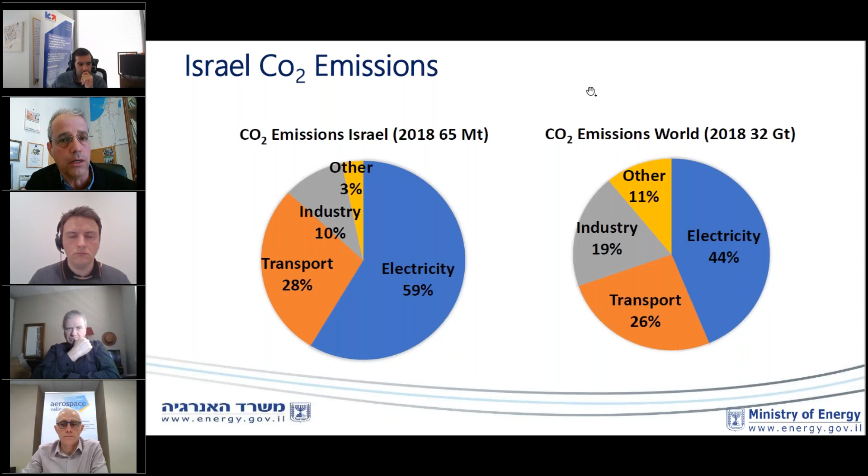Thank you. So for Israel, the situation is a little different compared to other countries. Every country has its own story, of course. In terms of CO2 emissions, which are the main driver for the transformation in the energy market, Israel has a very large electricity segment with about 60% of the CO2 emissions from electricity and then transport. The industrial sector in Israel is smaller, which is how we try to target our goals. Next slide, please. So our first goal is really the electricity market and the transportation market.

In terms of the way I view hydrogen, I like to separate it into 3 segments: the hydrogen generation, hydrogen storage and transportation, which are called logistics here, and then the hydrogen use, either directly as hydrogen, like in a turbine to generate electricity, or to generate heat from hydrogen, or through fuel cell to generate electricity again. So it's in a sense a cycle, but 3 segments.

The challenges in the hydrogen and the green hydrogen market are very significant still. First of all, there are costs in all 3 segments. The costs are high and not yet competitive. The logistics issue is a big issue. It's very problematic, as mentioned already. Hydrogen in aerospace, for example, can be liquid hydrogen, can be through a carrier or through compressed gas, but all of these have challenges in the logistics.

And finally, there is a very fundamental issue of the efficiency. So if we look at the whole cycle, the efficiency today of the whole cycle is around 30%, which in many ways, in terms of sustainability, is unacceptable, that we will throw away 2/3 of the energy. So we need to resolve all of these before hydrogen becomes a mainstream partner in the energy market. Next slide, please.

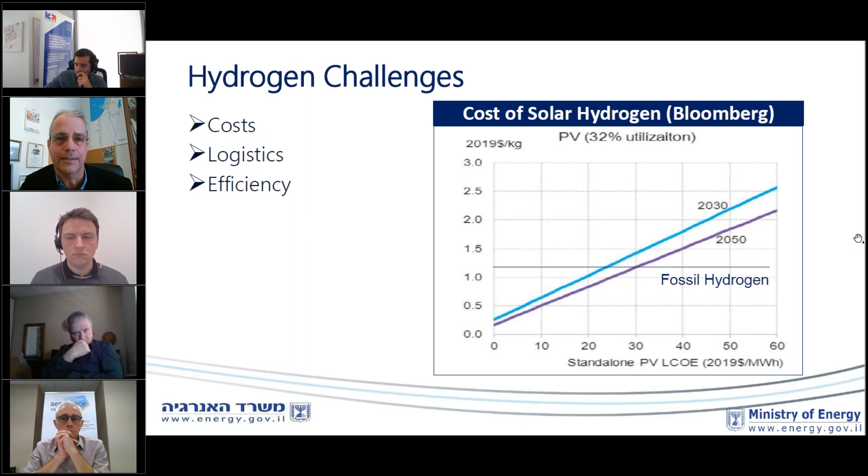I will now again delve a little bit into the special story of Israel. Israel is a small economy. So this means that Israel will not determine the market trends in hydrogen nor in any other markets. If the world goes to a specific solution, to hydrogen, Israel, of course, will follow. And this means that we will not be leaders in setting the trends. We cannot be; even if we think that one solution is the correct solution, it's meaningless. The larger countries will determine the world.

Israel is also a small country, so this has 2 implications. One, that for land transportation, potentially we don't need such long range solutions. We can probably do with shorter range solutions. And also, as we are a small country geographically, I will talk about it a little bit in terms of our renewable energy, which is solar and requires a lot of land. We have a smaller industrial sector, as I mentioned, and we have today large natural gas reserves.

I mention this because to generate hydrogen from renewable electricity takes about 10 times the energy compared to generating it from natural gas. Of course, we don't want the emissions from the natural gas generation. However, we do think there is a midway, in the sense that we are looking for technologies to generate hydrogen from natural gas without emissions. And this will be, I think, at least a temporary solution until the hydrogen market becomes mature enough and all the challenges are addressed.

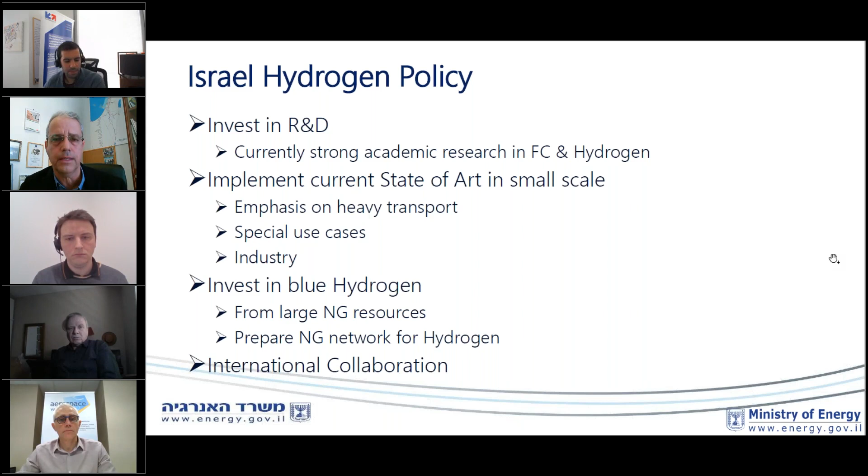We will invest in blue hydrogen as much as we can, or turquoise even, some if you are familiar with this term. And we will also want to prepare our natural gas transport system for hydrogen. Of course, we want to do international collaboration. We know we are dependent on that, both with our close neighbors and with Europe. And we have both plans for an electricity connection through Cyprus and Greece, and also originally a natural gas pipeline. But I'm sure that this pipeline will also be capable of transporting hydrogen in the future, whenever, if it's built.

A few interesting events and steps that we are currently taking: we are supporting essentially two refueling stations for hydrogen. They are in construction, hopefully will open this year. One of them will be a portable station, so it will be able to travel around and provide hydrogen where needed. We want to import heavy transportation, so as a ministry we're subsidizing essentially the buses, trucks, and heavy transportation that will run on hydrogen, so that we gain experience with using hydrogen.

And we are developing an intercity bus on hydrogen. This is not a tremendous innovation, but just adapting a bus to intercity, because we feel that this is where hydrogen has an advantage. We have several interesting startups, H2 Pro, which will be here later. And I mentioned already that we want to transform natural gas to hydrogen, so we are supporting methane pyrolysis research. And we are doing hydrogen storage underground. We are doing a new survey of the underground of Israel for storage and for CO2 storage, but also potentially for hydrogen storage.

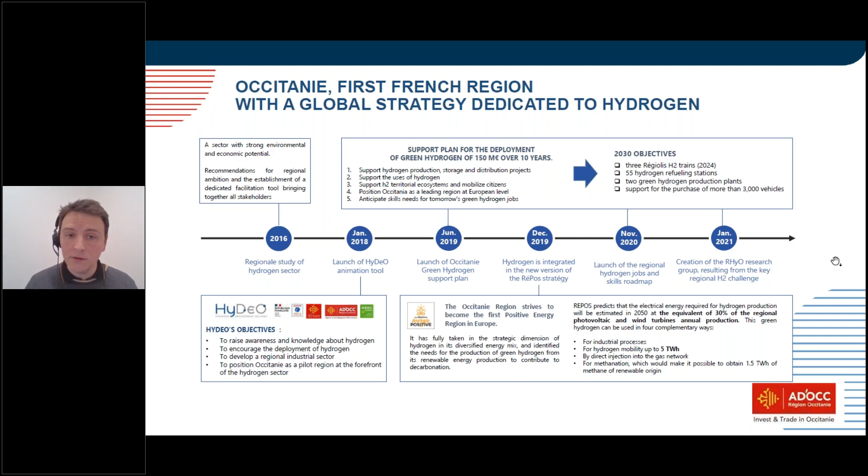In 2019, the Occitanie region launched a support plan dedicated only to green hydrogen, with 150 million euros over the next 10 years. Today, it's still the biggest and most important plan around hydrogen at a regional scale in France. We want to help the development and deployment of these technologies, generate huge projects, and because it's a region skilled, anticipate the development of skills and training to help companies and laboratories to recruit.

We have some objectives for 2030. We want to deploy hydrogen trains. We have an objective of deployment in 2024: more than 50 hydrogen refueling stations, 2 hydrogen production plants - green hydrogen production plants - and help the purchase of more than 3,000 vehicles using hydrogen as fuel.

It's part of our global climate and energy strategy to become a territory that produces the same quantity of energy that we consume. Hydrogen is a real help for this, because it's a possibility to convert and store renewable energy, and to use it to decarbonize mobility, industry, and buildings, for example.

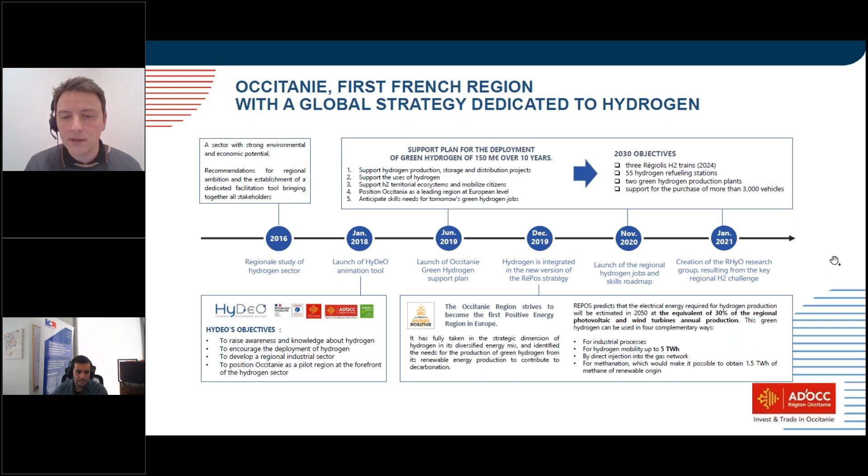Just to give you the last two points: we are launching a regional roadmap around the subject of jobs and skills, and we also created a global research and development group around hydrogen in Occitanie named RHyO, but I will speak about that just after.

The Occitanie region, like all administrative regions in France, has some missions. One of these missions is the development and coordination of transport in the region. We also lead and drive the main ports in the region. We identified that the use of hydrogen is a key factor of development, and where possible, we want to generate hydrogen consumption. That's the reason the region invests in 3 hydrogen trains. We want to put one in the Pyrenees mountain line, generating consumption of 62 tons of hydrogen per year.

We are also developing a hydrogen dredge for the harbors of Sète and Port-la-Nouvelle. We will be able to consume 72 tons of hydrogen per year. We are also working with the company Safra on the retrofitting of 15 coaches. And we have a huge project supported by the European Union with a global budget of 110 million euros, to deploy at the same time 2 green hydrogen production sites, 7 refueling stations for trucks, 40 trucks, and 62 refrigerated units for trucks. The name of this project is H2 Corridor.

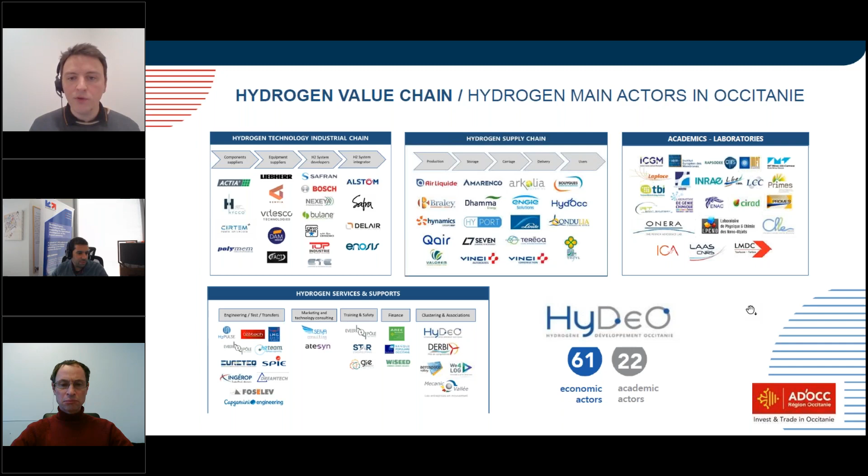On the global scale, it's more than 80 actors who are working on hydrogen in Occitanie. And if I put it on a map, it's the next slide, please.

You've got here the main projects with a color code. The blue ones are the industrial projects to develop and industrialize hydrogen technology. The orange ones are the infrastructure of production and refueling, and the green ones are the use, when we're leaving diesel consumption for green hydrogen consumption.

So you've got an overview of what happened in Occitanie. I hope it was very clear for you and very helpful. And I'm pretty sure in the next intervention, you will have the details that my presentation missed. Thank you very much. So thank you very much, Benjamin Febvre.

So indeed, it was clear. We understand there is a healthy competition as well in Europe to handle energy performance targets. And your demonstration shows the Occitanie region's strategy to position itself at the forefront.

And with Laurent Bizio, as you mentioned, we'll take it down now to the aviation applications. Laurent is also one of the main organizers of this webinar. At the Aerospace Valley cluster, you have a dedicated ecosystem on propulsion and embedded energy that you pilot. I told in the introduction that a third of all flights could run on liquid green hydrogen by 2050, for instance.

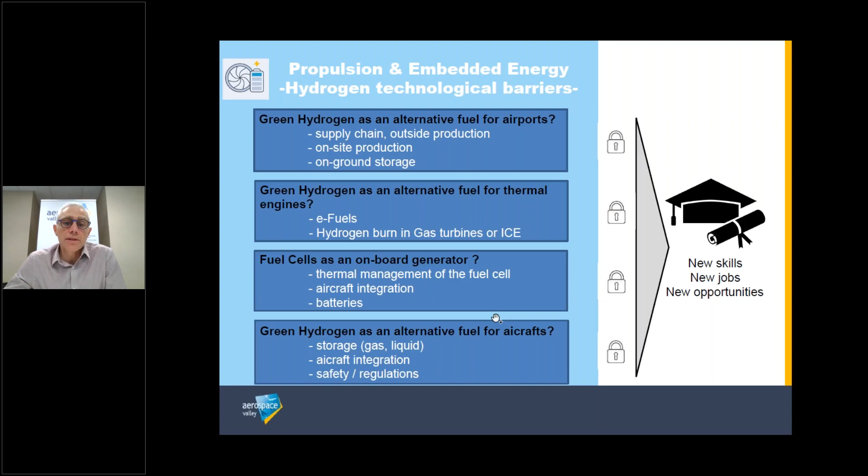What we think in Aerospace Valley is that light aircraft can be a very interesting and innovative laboratory, as a pre-chamber of commercial aviation systems, and as a demonstrator of new technology and return of experience for commercial aviation. That's the reason why we created the MAEL initiative one year ago, and now we have more than 300 members inside this community.

We think that with this initiative, we can develop technology in a quick way, because it's on smaller aircraft, so development delays are very short, and with a reduced cost to access this new technology. So thank you. We are very happy to develop this new chapter of aeronautics.

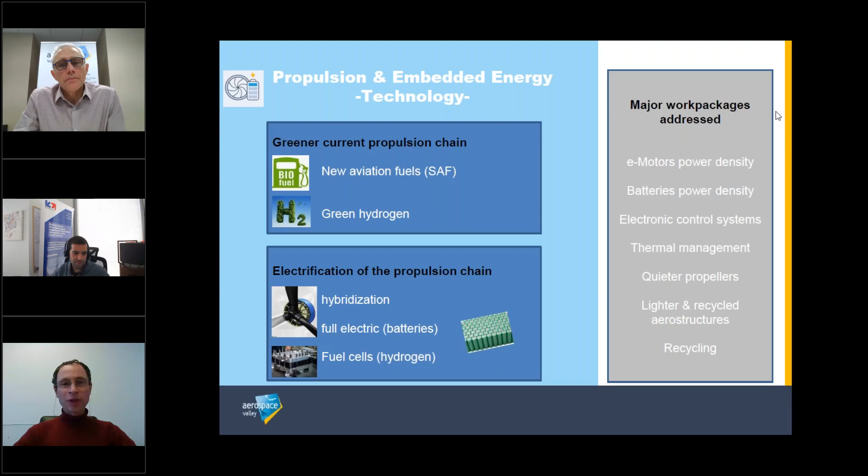We can't hear you. Hi, my name is Shachar, and I will be replacing Gideon for the Q&As. So the strategy in general is quite local. As Gideon said, we have several pilots here and the initial phases of a refueling station, etc. Apart from pushing forward the academy and the companies for innovation, we don't have any global strategy per se.

Okay, thank you. Thilo, do we have other questions, maybe for Benjamin or Laurent? I see a question for Laurent regarding the last slide: is the MAEL initiative open to international partnerships? Yes, the MAEL initiative is open to members of Aerospace Valley, and it's a good point. Among our 800 members, we have members outside the Occitanie and Nouvelle-Aquitaine regions. So yes, it's possible to have members outside the southwest territory of France.

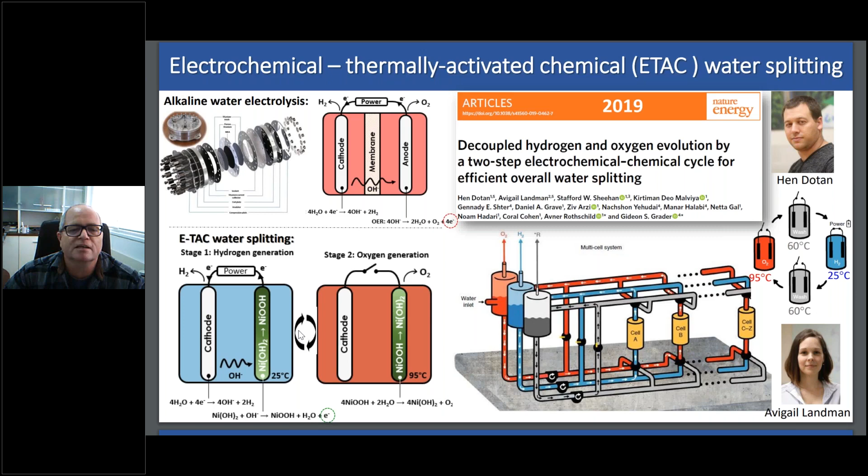If you look at the system, that's the figure on the right side. So each and every one of these cells is connected to three reservoirs. One has the hot electrolyte that generates oxygen. The other one has a cold electrolyte where we generate hydrogen, and we have a kind of a washing electrolyte to wash between the stages that is at an intermediate temperature. So this innovation was made by Hen Dotan and Avigail Landman, then students in our groups, and was published in this article in Nature Energy about 3 years ago.

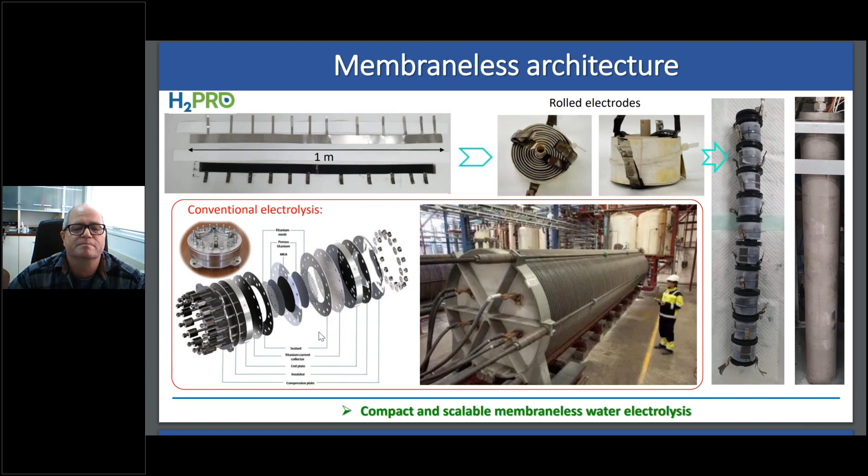The other advantage comes from high efficiency. So because we divide the process into two steps, we actually divide the oxygen evolution reaction into two steps in a way that is much more efficient and allows us to do our process at an average cell voltage of 1.5 volt, whereas other electrolyzers, except for the high temperature one, which is a different story, but all the low temperature electrolyzers, alkaline, PEM and AEM, operate at voltages above 1.8 and often above 2 volts.

So we can save a lot of energy, and our cell efficiency is close to 99%. And we expect that at the system level, we will be able to deliver more than 90%, perhaps even more than 95%. Next slide, please.

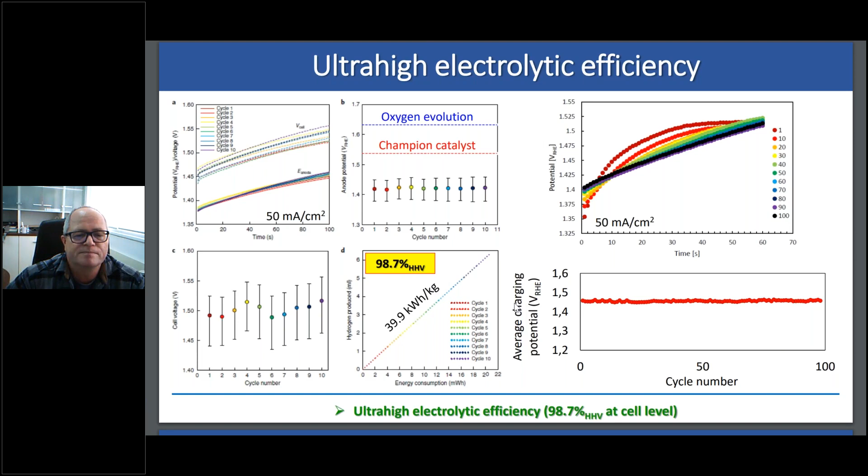Unfortunately, because there are 4 different species that are connected to this metallic site, they are never identical, which means that some of the reactions will be easier than the others, and other ones would have to be more difficult because the overall of the 4 steps is identical. And this is the reason for the overpotential loss of at least 0.4 volt, which degrades the efficiency of all of the conventional electrolyzers. So that is the standard electrolyzer. Now in the next slide, we'll show what we do in our case.

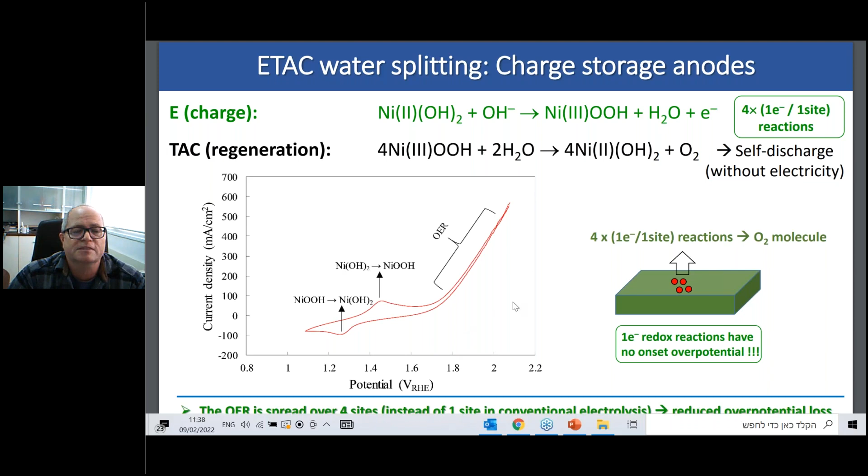So this electrode that we're using is based on the nickel hydroxide, nickel oxyhydroxide cycle that is not new. This cycle has been used in rechargeable alkaline batteries for nearly a century. So at least the charging reaction is the same reaction that you have in nickel metal hydride, nickel cadmium, and nickel hydrogen batteries. The latter is probably the most reliable battery that was ever made.

And the reason is because these batteries are the ones that are used in space missions such as the Hubble and other space missions, where they operate for many, many years. So this is a reversible reaction that allows us to run many tens of thousands of cycles. And the reason is because if you look at the atomic structure of this nickel hydroxide, you see that it is a layered structure where the hydrogens are connected to the oxygen and pointing up and down.

And essentially the difference between the charge and discharge is how much of the site is occupied. In the discharge phase, all of the sites are occupied by hydrogen, and in the charge phase, only half of them are occupied. So that is the mechanism of the charging. And then the second reaction, to generate oxygen, is pretty much the opposite reaction, which occurs chemically. Next slide, please. Last minute, Professor.

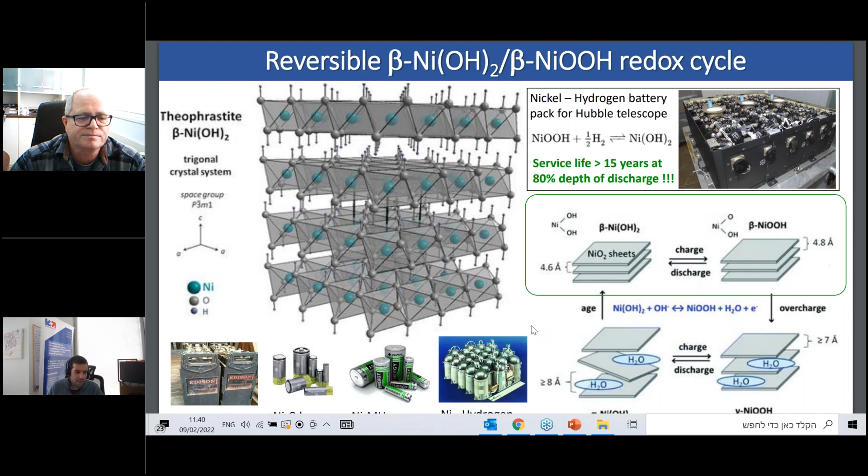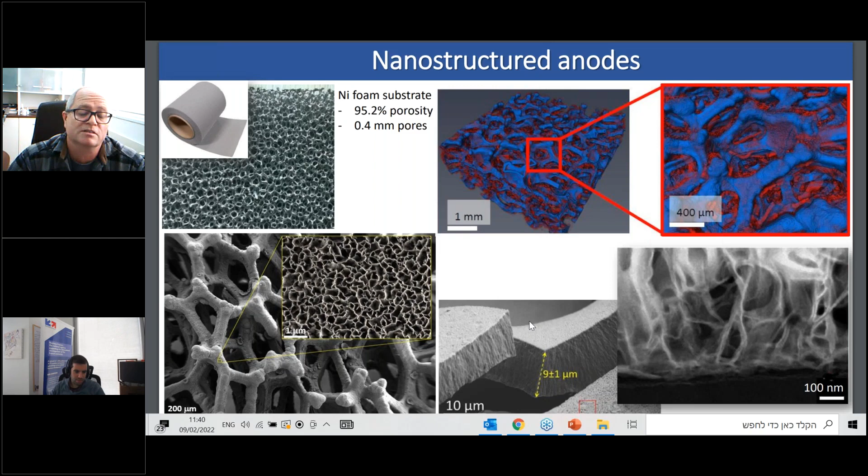Okay, so we take special care of producing the electrode in a very porous structure with fine internal structure that gives rise to easy access of the products of the reaction and the reactants in and out. So we start with a porous nickel foam substrate on which we grow our nickel hydroxide electrodes by electrochemical deposition, and we have this fine structure. You can look at the bottom right image and you see that we have flakes of only a few nanometers in thickness that allow very fast mass and charge transfer in and out of the active region. Next slide.

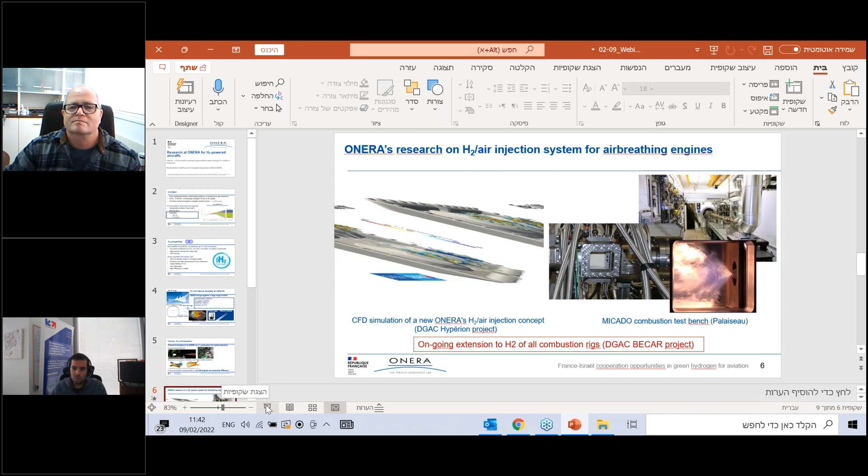And now we'll turn to Dr. Nicolas Berthier. If you can open your mic and camera, please. Dr. Berthier, you're a special advisor at the French Aerospace Lab ONERA, which develops research activities in the aerospace field. You are in the energetics department in the fields of numerical simulation and combustion, ONERA's representative for the regional key challenge, green hydrogen. What is your approach, Dr. Nicolas Berthier, to the existing challenges for aerospace systems?

Can you hear me? Yes, and do you hear me? Yeah, we can hear you very well. We just can't see you. Okay, so thank you very much.

My presentation is focused on research at ONERA for H2 powered aircraft. Next slide, please. Okay, to start my presentation, a brief reminder of the context. As everyone here knows, and as previously mentioned, the Paris Agreement and increasingly stringent norms on air quality impose finding solutions to reduce CO2 emissions and to improve air quality. For aeronautics, 3 ways are explored: sustainable aviation fuels, electrification, and of course, hydrogen, with 2 ways, fuel cell and combustion. In this presentation, we will focus on the use of H2 in aeronautics for combustion. Also, there are, of course, some common issues with the fuel cell, like storage, for example. Next slide.

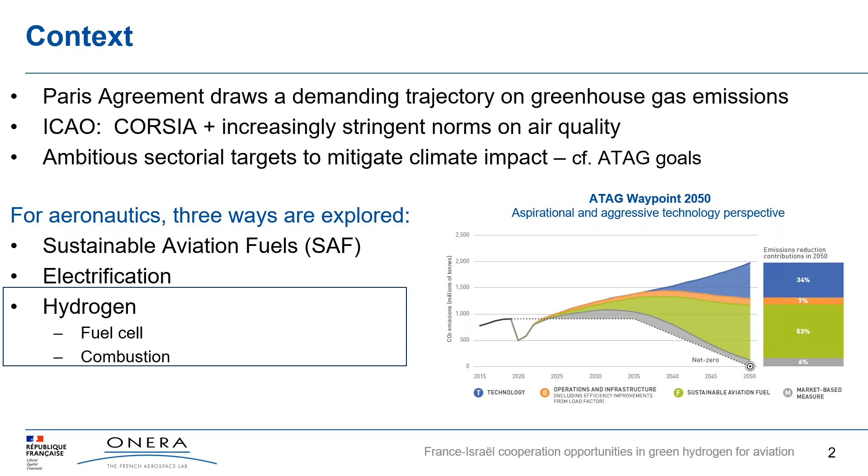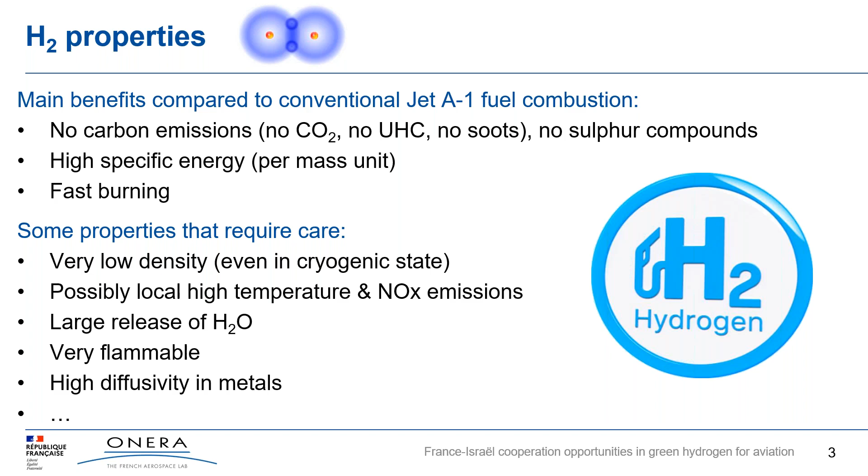Now, a brief recall of H2 properties. The use of H2 provides great advantages compared to those of kerosene. Indeed, there are no carbon emissions, no CO2, no HC, no soot, no sulfur compounds. H2 has a high specific energy, and H2 burns very quickly. But there are some properties that require care. H2 has a very low density, even in cryogenic state. There are possibly local high temperatures and NOx emissions, a large release of H2O. H2 is very flammable and has a high diffusivity in metals. So new technologies based on the use of H2 will have to exploit its strong points and limit its drawbacks. Next slide.

So the use of hydrogen for combustion in aircraft is a disruptive technology which impacts a large part of components. Therefore, to have a global vision of the problem, it's necessary to bring together a large range of skills like aerodynamics, energetics, materials, systems, which is the DNA of ONERA. If you look at the pictures on this slide, each of them illustrates a specific problem encountered with the use of hydrogen. From left to right, one of the greatest challenges with hydrogen will be the storage, probably under cryogenic state in order to increase density with the use of large insulated tanks. Choice of shape of tanks, which has a great impact on the design of the aircraft, materials of tanks, metallic or composites, and insulation processes are major questions currently being studied.

Then hydrogen will be led to the combustion chamber through an injection circuit, which must be perfectly sealed, even at the level of the welds, because hydrogen is a very small molecule which can easily diffuse through metals. Along this injection line, safety is therefore a first order problem, with in particular the treatment of possible hydrogen leaks. There will also likely be a fast change of hydrogen from liquid phase to gaseous one during its transport between the tank and the combustion chamber.

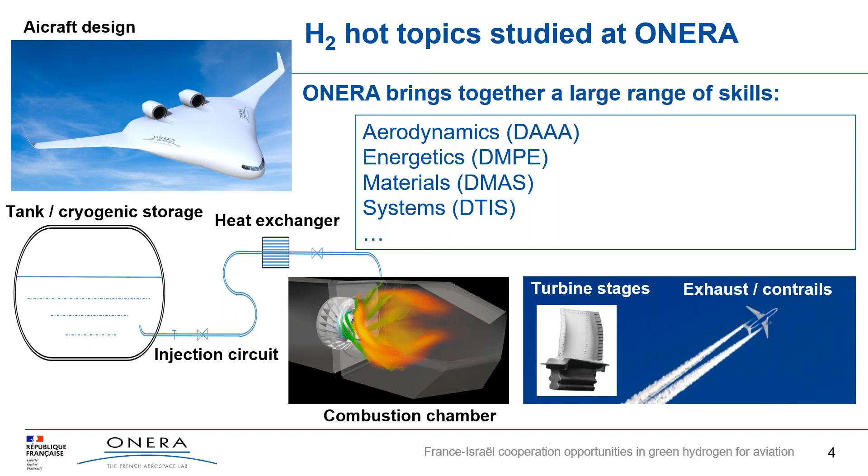There is an extensive background at ONERA on H2 combustion for rocket propulsion. But conditions on rockets and air-breathing combustion chambers are different in terms of power or pressure, for example. One of the most impacting features is that in rocket propulsion, O2 burns with H2, but there is no nitrogen. Therefore, temperatures are higher in a rocket combustion chamber, but above all, there is no risk to form nitrogen oxides. On the other hand, nitrogen oxides formation is of major concern for H2-air combustion chambers.

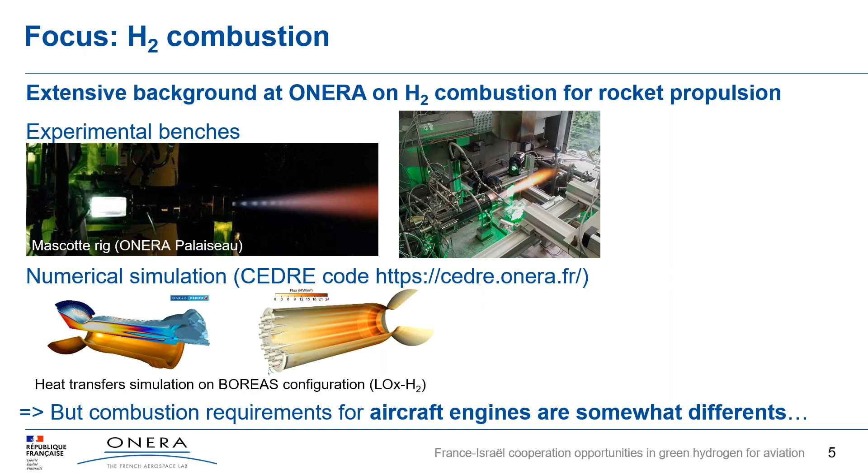Next slide. Therefore, we have been working at ONERA for more than a year on the conception of a novel injection system for aircraft, which ensures combustion stability, which is a very important point, and very low NOx emissions.

On the left of the slide, there is a movie of a numerical simulation result obtained with the ONERA CEDRE code. And on the right, the MICADO test rig, which will soon be used to test this injector.

These new injectors will be tested before the end of the year on our combustion benches at Palaiseau near Paris, or Fauga-Mauzac near Toulouse. Some of these benches could right now use a limited amount of hydrogen, and all ONERA combustion rigs will be gradually updated in the next years to allow a common use of hydrogen. These transformations will be carried out in the framework of the DGAC BECAR project.

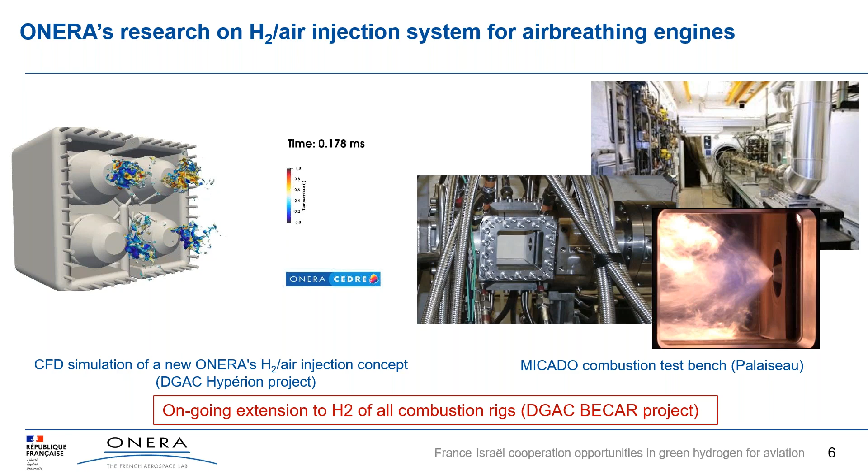Next slide. And at last, the Energia project, whose purpose is mainly to build a shared vision. It's a DGAC project led by ONERA with Airbus, Safran, and Dassault Aviation. There are two goals: to build a shared vision of the energetics outlook for decarbonization solutions, and off plane analysis. Some alternative fuels are analyzed, such as biofuels, electrofuels, methane, and of course hydrogen.

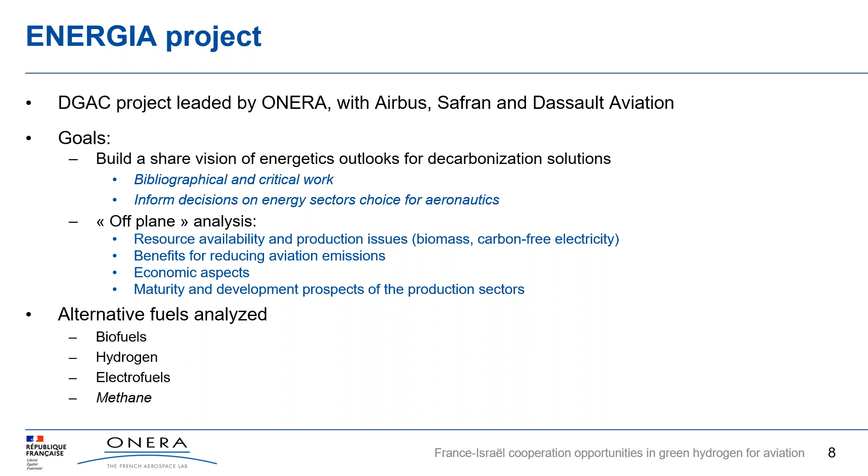Next slide. To conclude, H2 combustion could drastically reduce the environmental footprint of air traffic. Second, the physico-chemical properties of hydrogen are very different from those of kerosene and pose new scientific and technological questions. With both experimental benches and numerical codes, like CEDRE, covering physical fields ranging from aerodynamics to materials and energetics, ONERA can conduct multidisciplinary research on this new field.

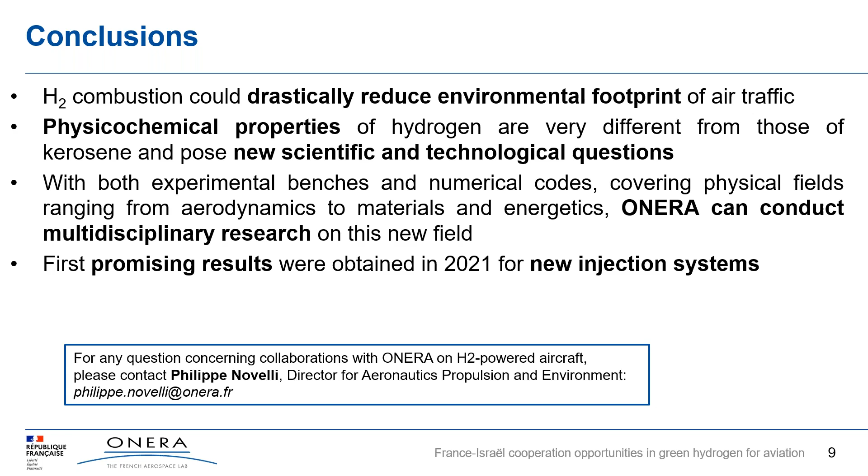And at last, first promising results were obtained last year for the new injection system. And, very important, for any questions concerning collaboration with ONERA on H2-powered aircraft, please contact our director for aeronautics propulsion and environment, Philippe Novelli, at philippe.novelli@onera.fr. Thank you for your attention.

Thank you very much, Dr. Nicolas Berthier, for explaining ONERA's approach and the promising results obtained last year. We heard before about the Technion's breakthrough research in Israel. Now, with another famous university here, Professor David Zitoun will present the Bar-Ilan activity on hydrogen regarding material science research for production and use of green hydrogen. Please, Professor Zitoun.

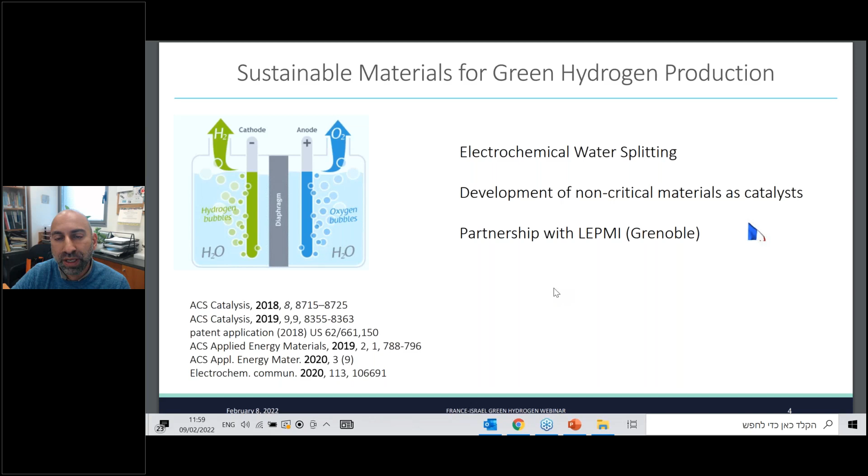We have a partnership with a lab in France, the LEPMI in Grenoble, where we've gotten enhancement of the activity of materials using electromagnetic field. This is a breakthrough, because you can really get a more efficient system - about 20% more efficient than without using any kind of field. Next slide, please.

I'm going to present one example of enhancement you can achieve by slightly modifying the system. I'm talking about electrolyzers. On the left side is a simple scheme of an electrolyzer. Usually you use an aqueous solution, in this case an alkaline aqueous solution, passed through a device made of a membrane and two electrodes. We add one additive, which is a waste product, urea, also called AdBlue. It's a very simple additive. It's a waste.

Simply by adding this waste, you get less power consumption, about 200 millivolts less voltage for your electrolysis. This is based only on non-critical raw materials, in this case only nickel. We've recently published this work. We believe this will be the future of hydrogen, using waste in the device so that you benefit the industry by reducing waste while also getting a more energetic and efficient process.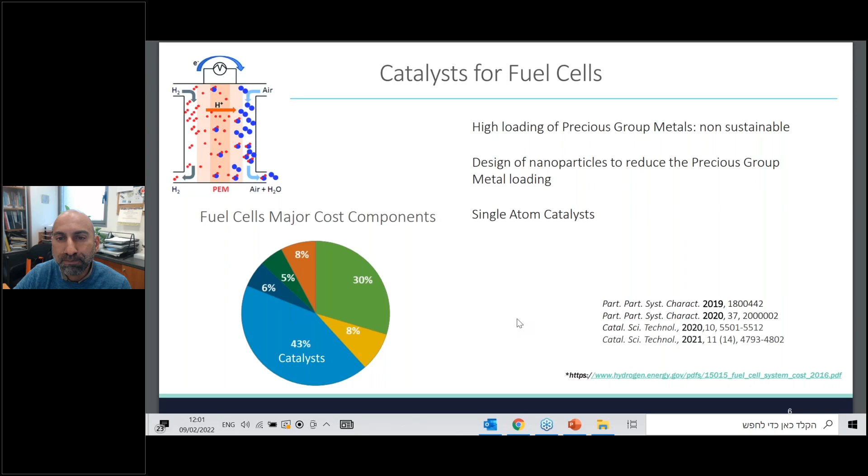We are working on both PEM fuel cells and alkaline fuel cells. The alkaline fuel cell work is a very good partnership with the company Hydrolite, which we'll present in the afternoon. We've been working a lot to develop non-critical raw materials, and we have a list of achievements we're very proud of as a research lab partnering with this Israeli company, and that's something we're looking to continue.

Usually we have a lot of research and development through joint partnerships between industry and research labs in Israel. This is something we should also do across the borders between France and Israel. I hope the next call for proposals will really promote this kind of activity.

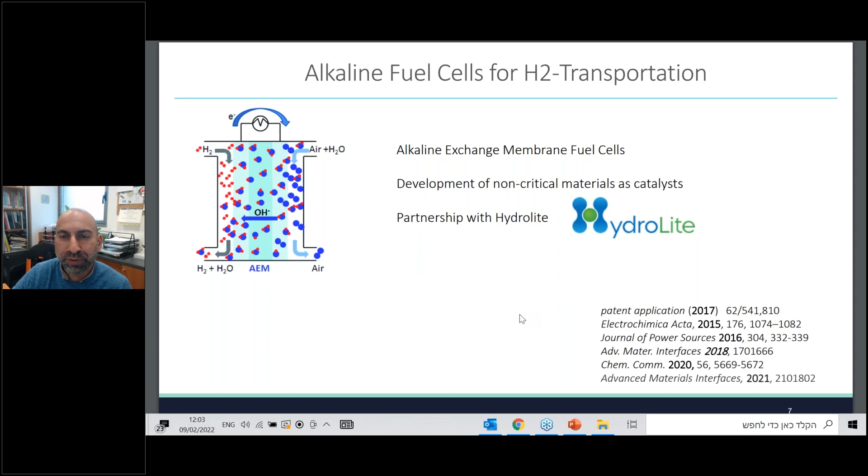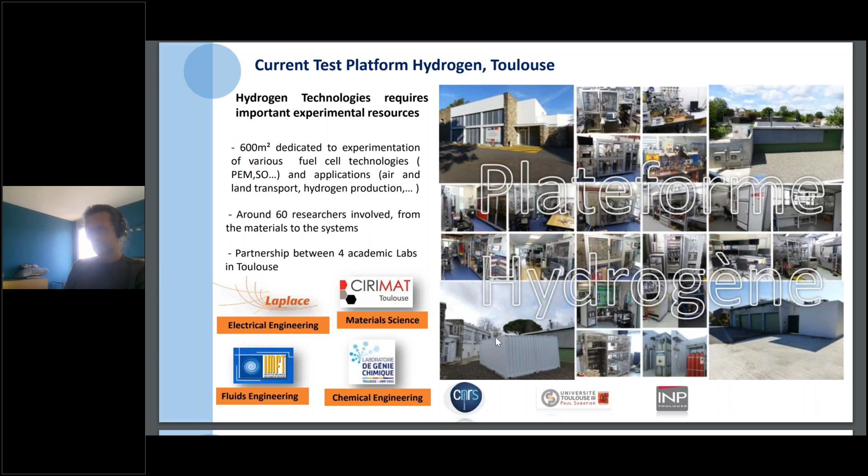So, following the rapid development of hydrogen application and, in fact, the increasing demands of partnerships for industrial and academic projects, the construction of a new platform is planned. With a surface of 10,000 square meters, this project will benefit from financial resources for infrastructure and also financial resources for scientific equipment. The final delivery of the center is planned at the end of the year 2024.

This platform will be organized around 3 main topics. The first one concerns a space dedicated to test benches of high power application and will allow tests under various operating conditions, for example, variation of pressure, of temperature, of humidity. The second one concerns a space dedicated to research projects with low power tests and specific instrumentation to favor experiences focused on the study of scientific and technological obstacles.

The third one concerns a space dedicated to professional and student training around hydrogen technology. Moreover, the platform should be provided with a high-capacity electrolyzer to have an autonomy for the H2 production. Notice that this project already has a strong industrial support and interest, including the field of land and air transport application, for example. Thank you. Next slide, please.

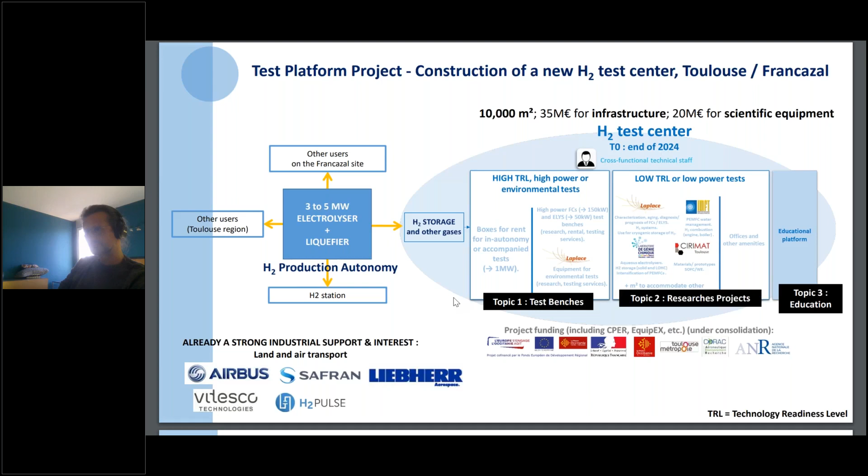In association to the current and future platforms, several projects exist from the local to the national scale. An example of local project is a project called LLITCHY. It allows the 4 labs previously mentioned to work together, each lab having its own area of expertise. The laboratory Laplace works on fuel cell and electrolyzer with diagnostic, aging, and system considerations. The IMFT works on modelization of transfer and hydrogen combustion also.

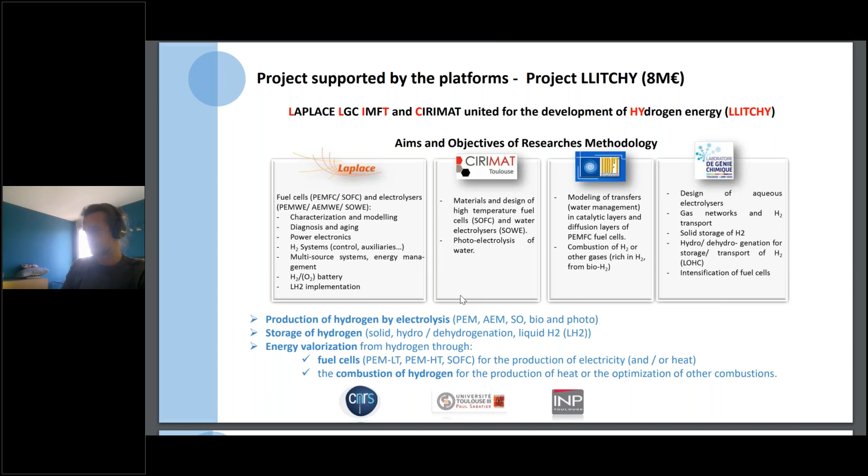The CIRIMAT works on material and design of fuel cell and water electrolysis, and the lab of Génie Chimique works on gas network and H2 transport, and also on the design of aqueous electrolyzer. So all this skill in one place allows to address 3 of the main existing challenges for hydrogen, that is to say, the production of hydrogen by electrolysis, the storage of hydrogen, and the energy valorization from hydrogen. Next slide, please.

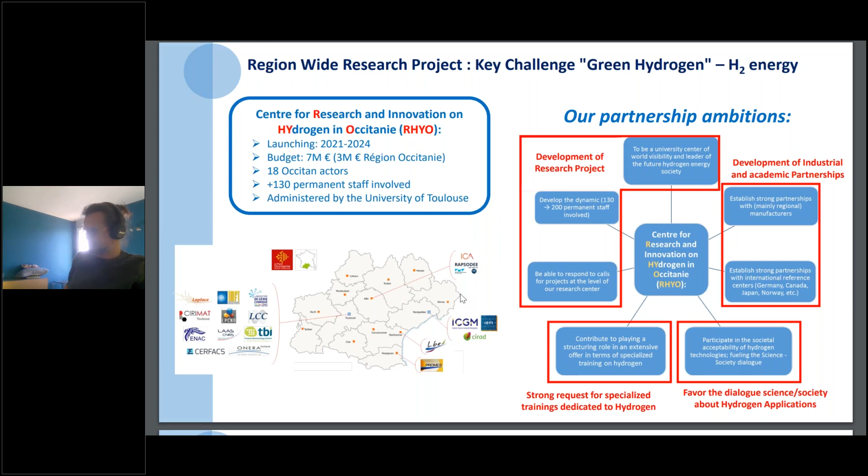Another example of project is the project RHYO dedicated to green hydrogen. This region-wide research project is a federation of labs from the Occitanie region. The partnership ambition of this project is first to favor, of course, the emergence of innovative research projects concerning hydrogen technology, but also to develop new industrial and academic partnerships. In addition, the educational issue and the social acceptability of hydrogen are also addressed in this project. Next slide, please.

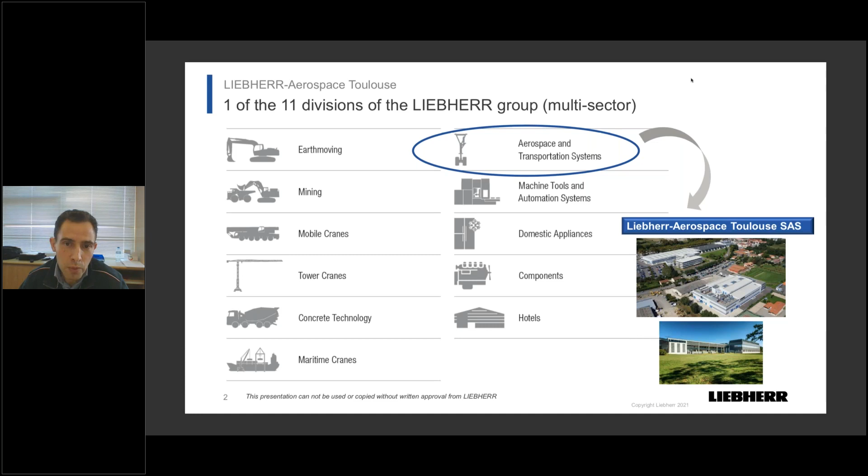So Liebherr Group is a multi-sectorial group which is facing several energy and environmental challenges that can impact all sectors, including aerospace and ground transportation. So hydrogen in general, and in particular using fuel cells for hydrogen applications, is a key topic for Liebherr Group and seen as a promising solution to answer different environmental challenges and also our product needs. And we have been investigating this technology for more than 10-20 years in the frame of different R&D programs supported by the French government or by the European Commission. So here today we'll focus on what is done by Liebherr Aerospace in Toulouse. So if you go to the next slide, please.

So Liebherr Aerospace Toulouse is the center of excellence of Liebherr Group dealing with air systems and thermal management, which means all systems that support the main functions in the aircraft: pressurization, air conditioning, cooling aspects, ice protection, and so on. So we are addressing the electrification of the main systems for aerospace needs by considering also mutualization with the new product lines, and in particular by considering a global approach to optimize the energy management, and more specifically the thermal management on the different nodes, by considering also new kinds of sources, in particular green sources that can be provided by fuel cells.

So this is the reason that we have launched a specific project, which consists of using fuel cells as the main power source to supply the different major loads of the system. I'm talking about the non-propulsive part of the aircraft, considering mutualization aspects in terms of energy management. And we have developed some dedicated testing facilities in order to be able to make dedicated tests considering the complete value chain from the generation up to the load.

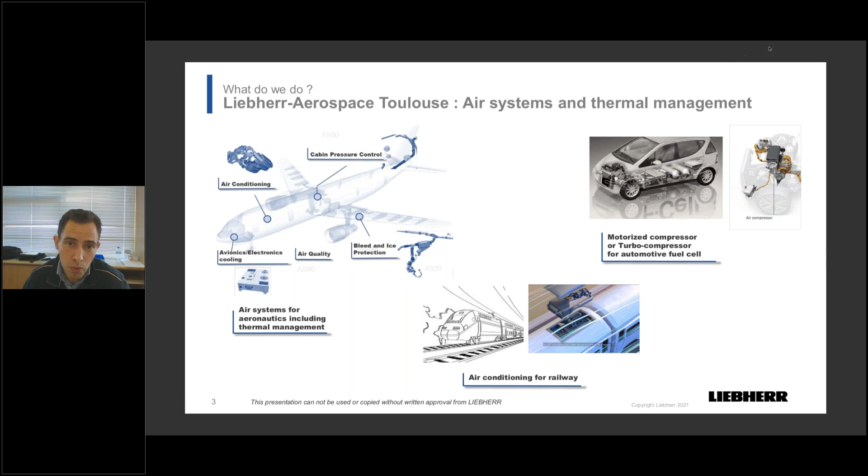If you go to the next slide, please.

So what is specific to Liebherr Aerospace in terms of activities done internally? We can consider that our contribution is carried out on two main parts. The first one is the compressor for the fuel cell, based on the pedigree we have developed during the last 20 years for the automotive field. There's a real added value in providing a turbo compressor using foil bearing technology, which means no lubrication system, so no risk of polluting the fuel cell membrane, and a more compact system, with advantages in terms of capacity and weight saving.

So we are using the same technology to provide a solution for aerospace, which was launched some years ago now. For aeronautics applications, we are considering a more global approach. Liebherr is in charge of the system aspect, meaning the complete system, including the fuel cell stacks, considering the best way to integrate the system, in particular regarding thermal management, and to consider energy recovery capability in order to use in a smart way the thermal energy generated by the fuel cell, for example for other systems of the aircraft.

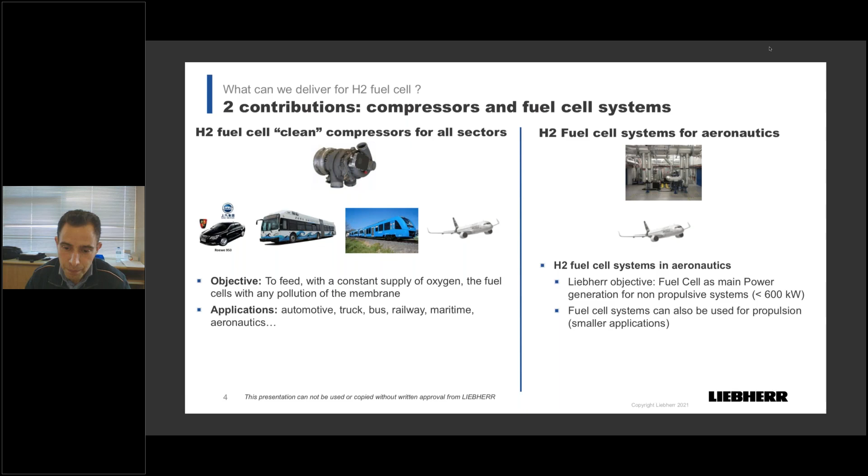If you go to the next slide, please.

So here the objective is clearly to demonstrate the capability to use fuel cell technology as a potential green source for aerospace applications, considering that it should also be considered as a main power source, which means, in terms of certification aspects and so on, considering all criteria in order to be able to use fuel cells as the main power source for non-propulsive systems. This is the reason that we have launched a dedicated project considering different challenges.

One of them is to be able to take benefit of what was done in the past in other sectors, like the automotive field, in order to take benefit of the maturity of the technology initially developed there, to accelerate the roadmap for developing fuel cell technology for aerospace applications, considering, of course, the specific aerospace requirements. So we clearly believe that fuel cell systems can be promising as a dedicated power supply for non-propulsive systems.

The second main challenge is to consider the mutualization aspects with the other systems, and this is the reason that we have to consider a global approach, in particular regarding energy management. We should not only consider the ways to cool down the fuel cell itself, but consider a more global picture of how the fuel cell can be integrated with the full non-propulsive system, and how we can manage the energy from an electrical and thermal point of view considering synergies. This is the reason that we have dedicated activities related to energy management considering mutualization capabilities, with a dedicated demonstration on a test bench developed in Liebherr facilities.

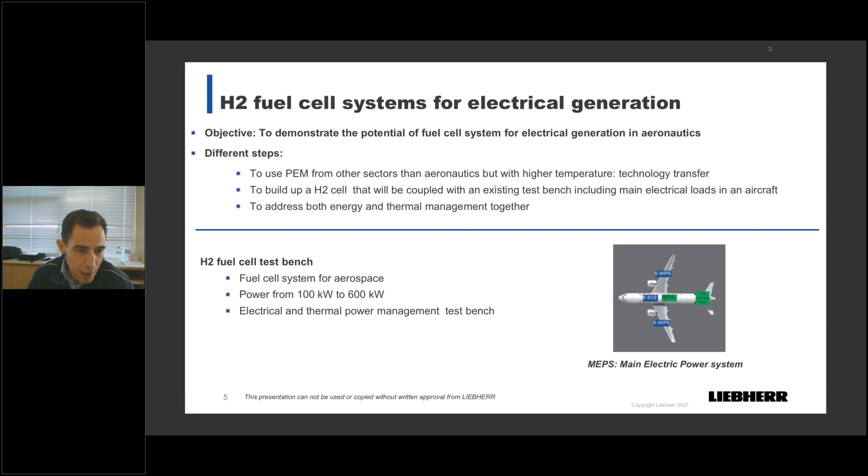If you go to the next slide, and it will be my conclusions. So in terms of expectations, the main mission is we need to reinforce the synergy between the sectors. We know that the pedigree on fuel cell activities is more mature in ground transportation systems, and we have to take benefit of what was done in that sector for aerospace needs.

And for that, we are supported using different structural programs, like Clean Aviation, which is under preparation, and the first call will be launched in the coming months. And we will have, I hope so, some dedicated activities on fuel cell, and to make a strong link between aerospace and other sectors in terms of mutualization, in order to support this challenging roadmap, and that will clearly be a key enabler to reach the global objectives in terms of zero emissions targeted from 2035.

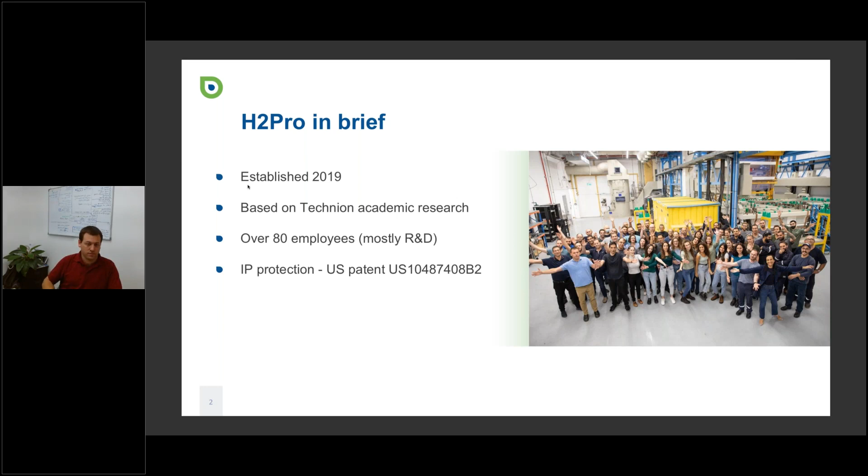Basically, the goal of the company is to be able to deliver systems that will produce green hydrogen for $1 per kilogram before the end of the decade. In order to achieve that, we plan to provide products that are going to be very efficient and lower cost. Regarding the low OPEX required for that, this was achieved by the high efficiency of the system, which means that it will consume much less electricity compared to conventional electrolyzers. In addition, the system cost is expected to be significantly lower, mainly because of the simplicity of the system, and especially the stack.

I'll show it later briefly, but in general, our system is very similar to alkaline electrolyzers if you consider the entire balance of plant. But the stack itself is what we completely change and revolutionize based on the E-TAC technology and make much, much simpler. We believe that this will allow us to sell those systems at a much lower cost compared to what a conventional electrolyzer can provide. In addition, because we generate the hydrogen and oxygen in two separate steps, it can be much safer, and it also allows us to produce the hydrogen at higher pressure. Next, please.

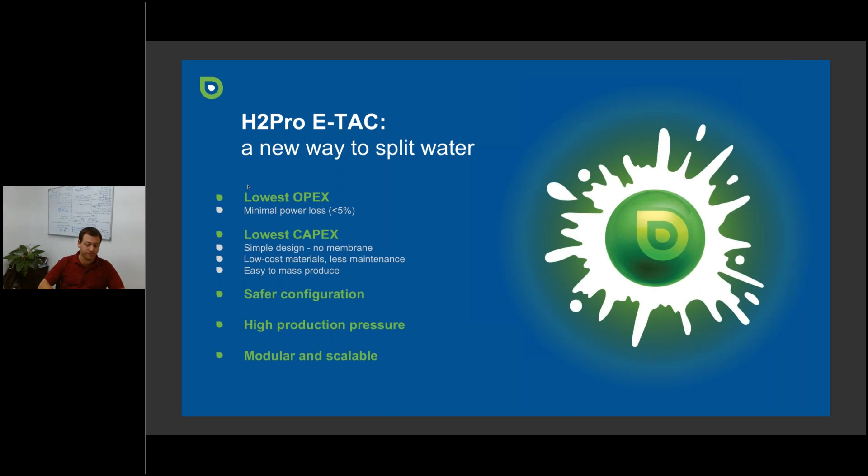So if you compare E-TAC technology to PEM and alkaline electrolyzers, the first and main difference is the low power consumption that comes, as Avner explained, from removing the electrochemical oxygen evolution reaction and replacing it with a chemical reaction, which does not consume power. This allows us to produce the hydrogen much more efficiently. Next.

The technology was already vetted by multiple third parties, starting with Nature Energy, of course, the journal. And then before the company started, we were deeply examined by the Fraunhofer Institute, which came and examined the technology before the company started as one of the requests of our investors. And lastly, in 2020, we won the Shell New Energy Challenge, which also understood the great promise that the E-TAC technology has for this field.

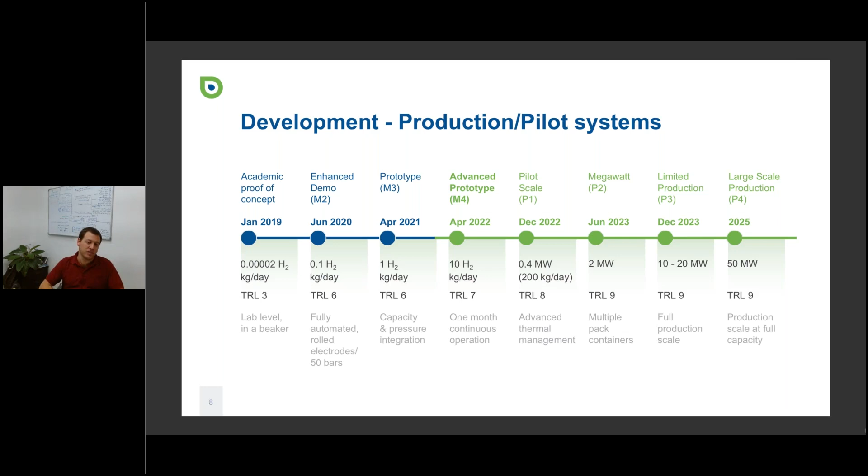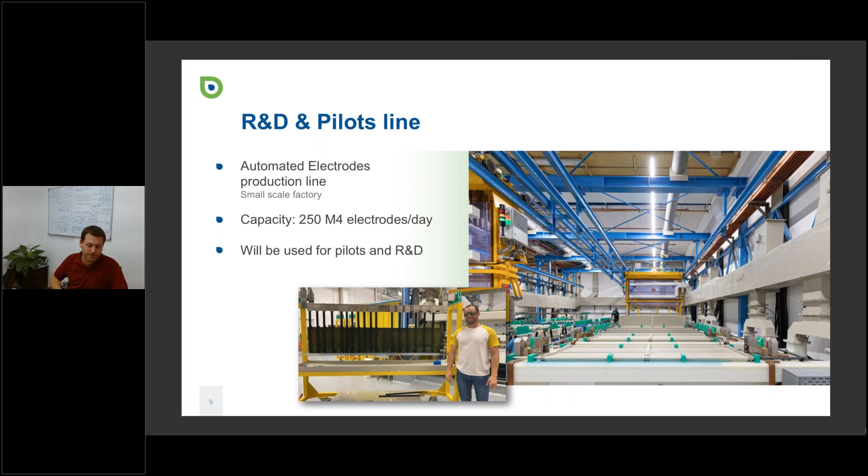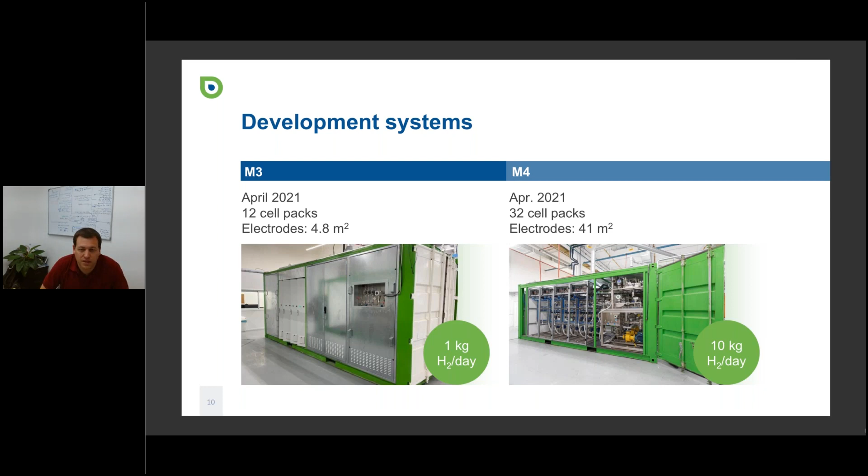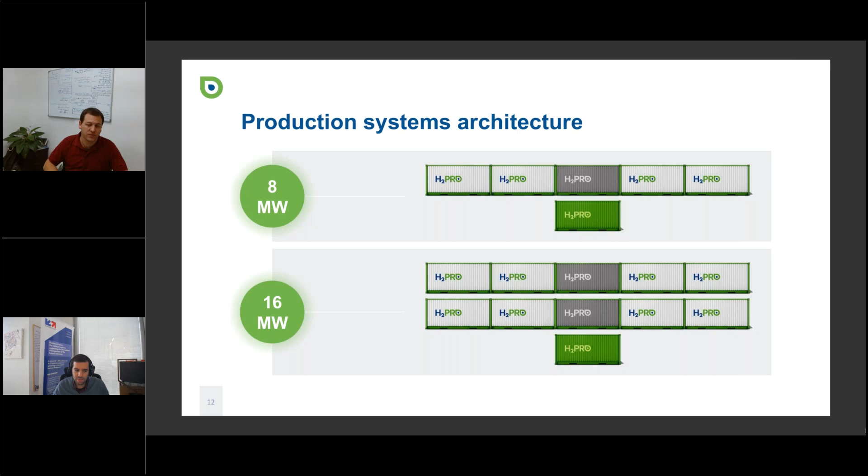Last minute, please, Ren. Yes.

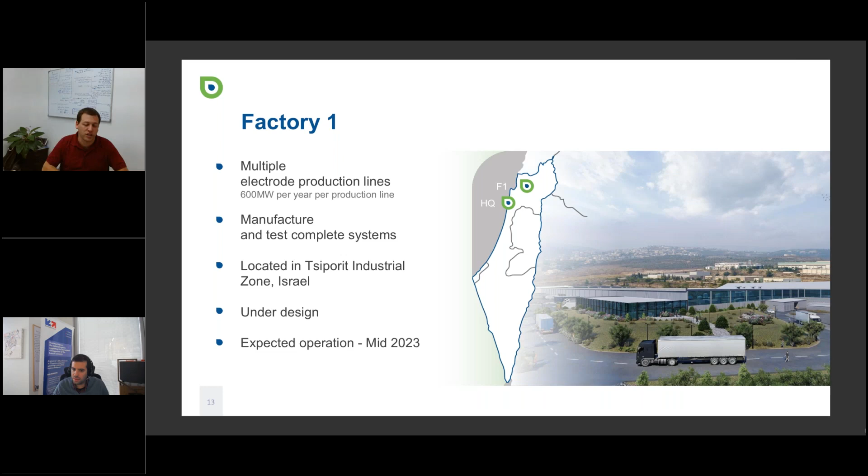Thank you very much, Ren. For sure, we understand now your technology can help develop green hydrogen production very soon. And now going from H2 Pro to H2 Pulse with Cyril Gagnepin and Elvire Bregoli from France, which supports companies to achieve their hydrogen projects and is part of the Toulouse Hydrogen Platform. We talked with the Laplace Laboratory before. Who and how do you support the projects? Please, Elvire and Cyril, go on.

Yes, thanks for this webinar and thanks for inviting us to speak about H2 Pulse. I am the executive assistant, and now Mr. Cyril Gagnepin, our CEO, will present H2 Pulse, our customized services and our specificities and strengths. So please, Cyril.

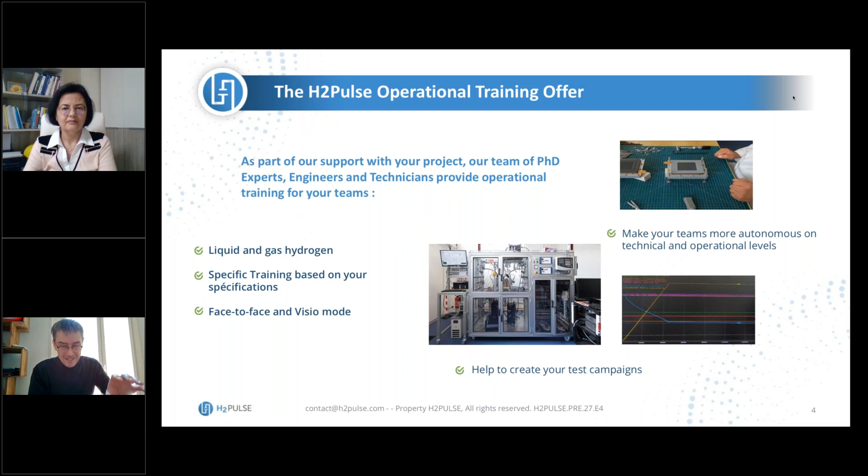The second job of H2Pulse is engineering. In engineering, it's the same thing, based on the request of the customer, different points. We work a lot on modelization because a lot of customers ask us for help about modelization, but we also work on different aspects for the factory, for the different fuel cells and electrolyzers. With our PhDs, we have a lot of know-how about hydrogen, and it's possible for us to make specific engineering solutions.

Now it's important for you to understand our specific goal, because okay, we help our customer, but at the end we want to build a specific test tool for our customer. For us, a specific test tool could be an algorithm, a software solution, an electronic test card, why not, a test bench, or a different solution. It's very important for us to understand the requirement of our customer and to make a specific product. H2Pulse - we study, we help, we make a lot of training, but at the end, the strategy of H2Pulse is to make a specific test tool for our customer.

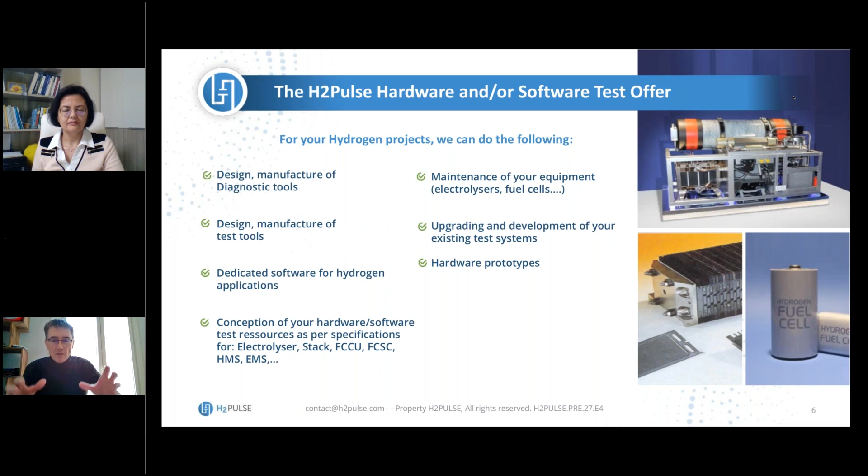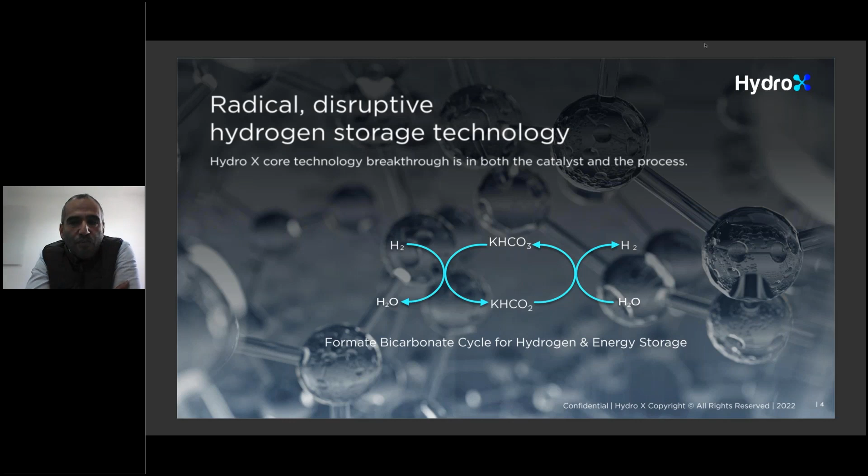Number one, the process is very simple - I won't get into the details, we're a little bit late on schedule.

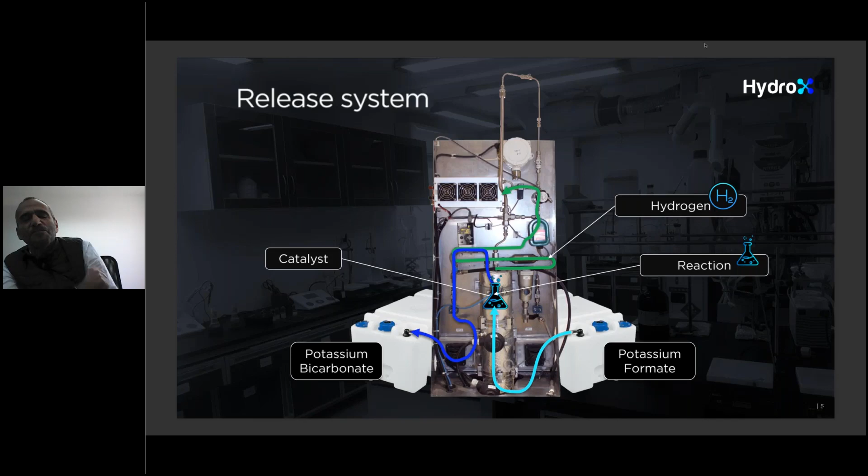The process is totally green, and the materials are totally green - you could actually drink the carrier of hydrogen. That means the operation is very simple, with no safety issues, no very high compression or very low temperature as in traditional technologies. It's a very simple, non-toxic, non-explosive, non-flammable material, which makes the whole operation completely different from what we're used to today.

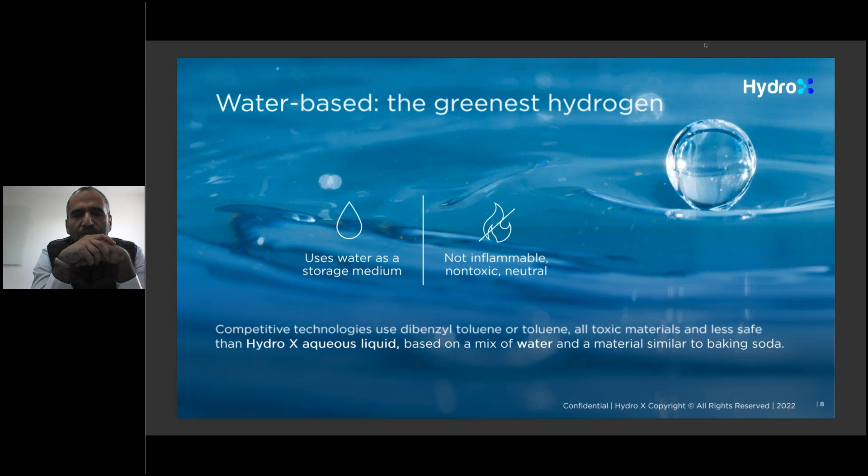Beyond being totally green, it is highly energy efficient. The temperature and pressure required to make this reaction happen in our systems are really minimal, and as a result, the energy efficiency of the whole process is pretty unparalleled in the industry.

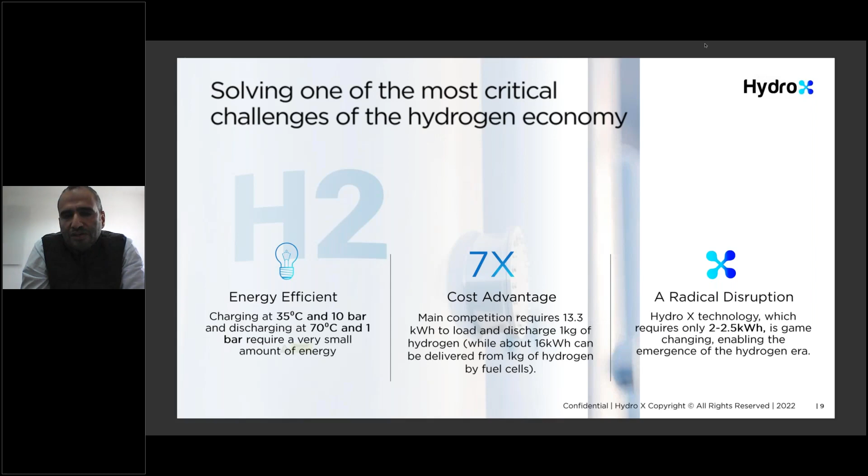Now a bit on the history - this technology has been developed for more than 30 years at the Hebrew University of Jerusalem. The academic research spun off from the university to become a startup a few years ago, and mainly in the last 2 years, after some initial investments were made to the company, we started developing the technology. I joined a few months ago to take this company to the next step, based on the very disruptive patented IP and the scientific team of the company in our labs here in Jerusalem.

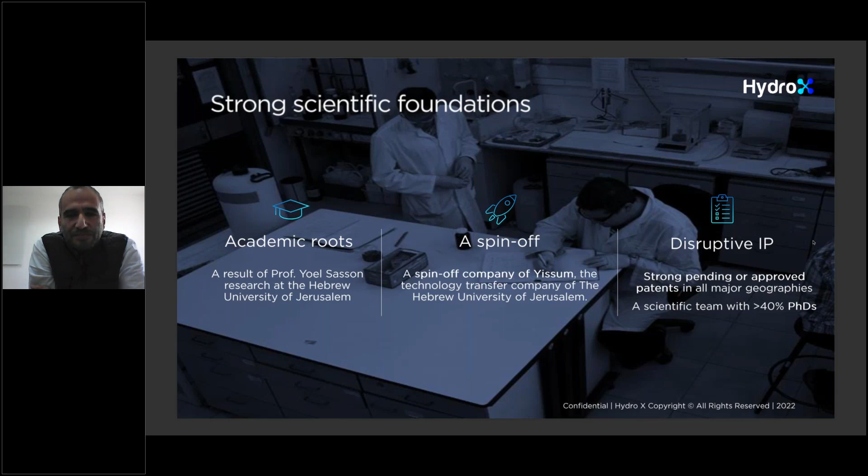We're now supported by international partners and strategic investors, which include - joined recently by CLP, the energy giant from Asia, and even more recently by EDF for renewables, and Johnson Matthey from the UK - other strategic partners who understand and got the potential of this technology.

Our plans going forward: we're planning to launch our first products into the market by the end of next year, in 4 main vertical markets. The first is traditional industry, the main market for hydrogen storage today. The second is the renewable market - solar and wind - a domain where we're looking forward to deploying our products and pilots in the next few months.

Facilities like data centers, needing backup solutions - green ones replacing traditional generators - are another domain. And of course, last but not least, the domain of mobility: transporting hydrogen to fueling stations for vehicles, trucks, rails, and of course aviation, which is definitely a major domain of potential business for us.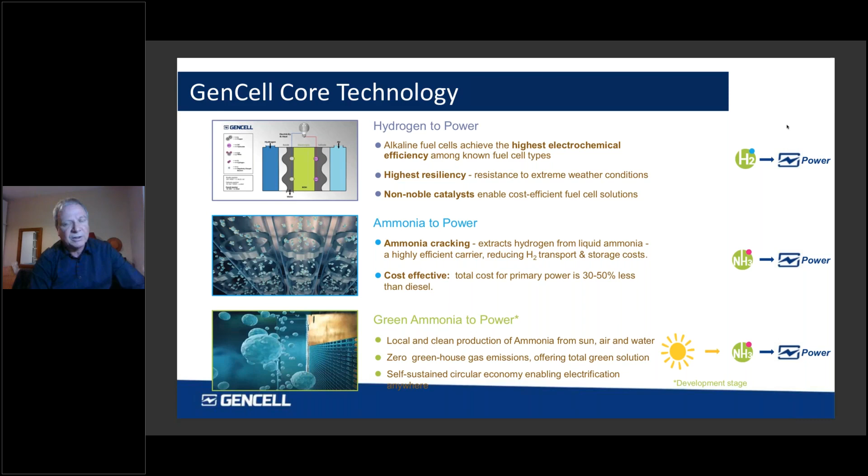If we can go for the next slide, please, you can see that we are talking about a world that is moving to sustainable transportation, and we know that hydrogen is going to lead. So it looks like the whole webinar is dealing with that. Next, please. We're talking about a way how to convey very, very efficiently the hydrogen.

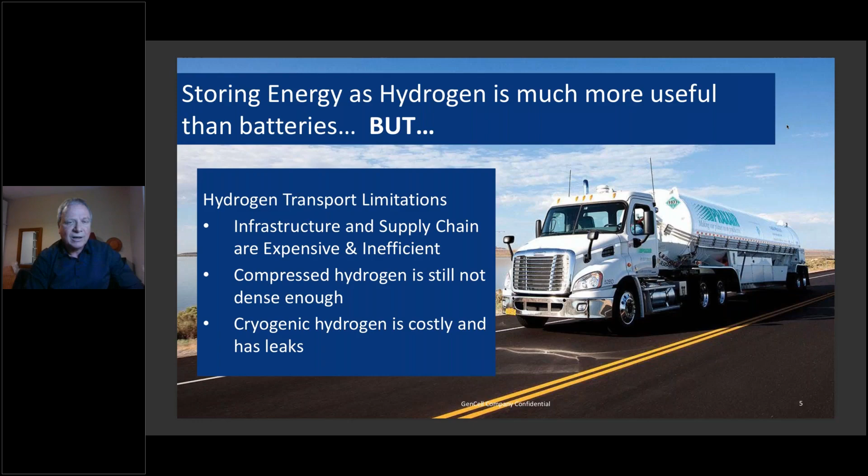So what we are talking about is trying to wrap the hydrogen in a much more cost-effective and also effective way, not as liquefied hydrogen at low temperature, but to convert it into ammonia. So you can see next, we're talking about using ammonia, the NH3, and by our special patent.

That we started also to deploy now with cracking on the spot. So hydrogen with a special catalyst material is losing the connectivity to the nitrogen molecule, and then with a very small mass, relatively small mass of heat, we let the hydrogen leave. So N2 comes back to the air, hydrogen H2 gets to our fuel cell.

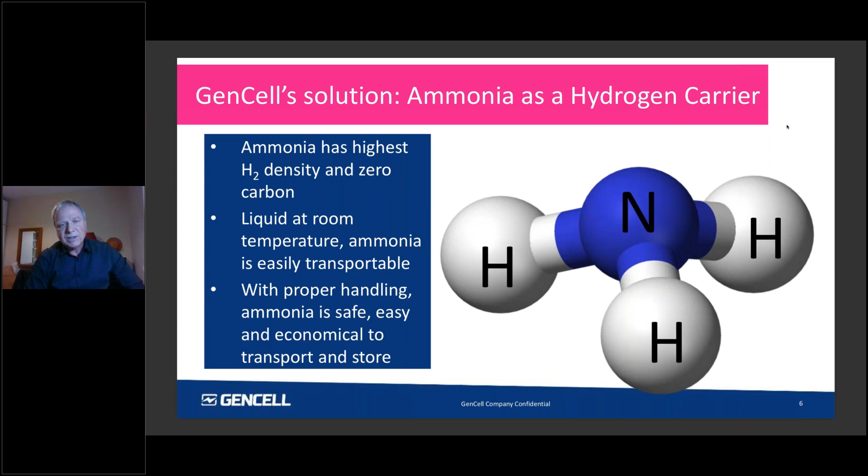If you look to the next slide, please, for transporting it, you can take every single ton of ammonia which can hold more than 2 megawatt hours. It's 2.3 megawatt hours of energy to use by the fuel cell, net energy. So if you look at the size, it's 1.2 cubic meter, and you have like a battery of more than 2 megawatt hours. You can go later to the next one.

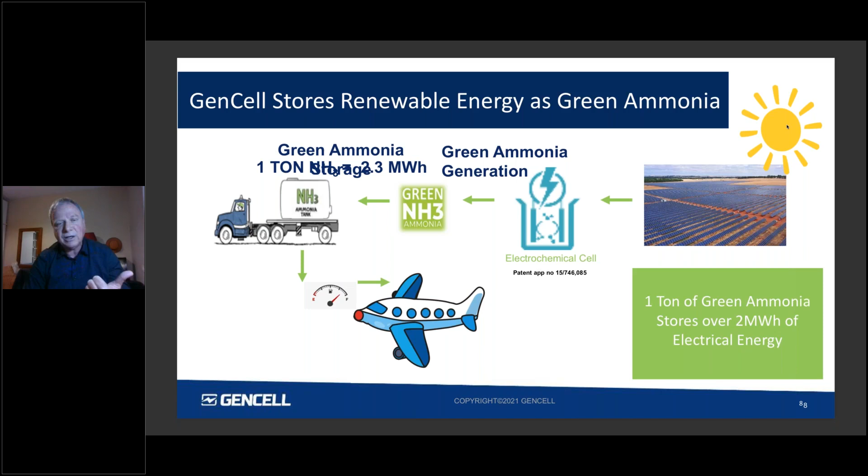So what we have here is the entire cycle from sun directly to green ammonia, very easy to transport, and then you can decide whether you want to fuel the airplanes by ammonia and crack it in the aircraft, or you can do the process where the ammonia is cracked on the spot going to hydrogen, then it could be used by the aircraft, or also with the ground support systems that could be all green, all run on green ammonia that came from renewable resourcing.

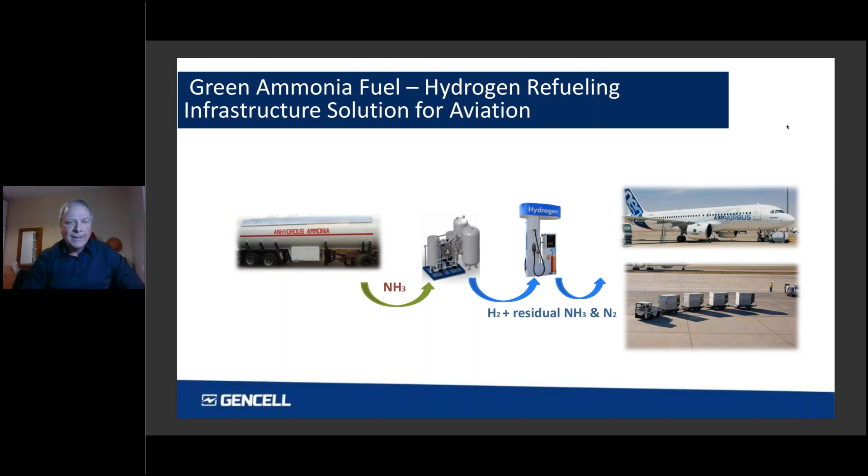Then if you can go to the next one, these are the key benefits. We overcome the cost and availability issue of hydrogen transportation, because we can see several options to get to low cost, green hydrogen, but the barrier is the transportation and storage. Here we supply the solution by wrapping the hydrogen as ammonia, then cracking it on the spot with very low losses. The endpoint, we can already show a very high efficiency and economic solution for the hydrogen future financial world.

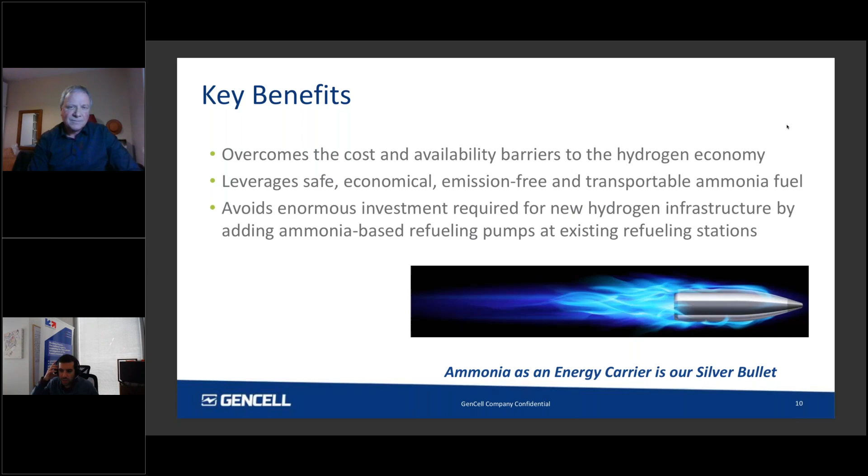You all know Airbus is a global pioneer in the aerospace industry, operating in the commercial aircraft, helicopters, defense, and space sectors. Airbus has the ambition to develop the world's first zero-emission commercial aircraft by 2035. And Frédéric Rigal works as an engineer on the Airbus strategy to minimize the climate impacts of the aviation sector. So Frédéric, you're the last but not the least of our speakers. Please, the floor is yours.

Yes, thank you, and thank you to all the speakers. So indeed, in Airbus, we consider hydrogen in the global context of the ways to minimize the climate impacts of aviation. We know that there is no silver bullet for our sector, and we are conscious that our next big challenge is to deploy the multiple solutions that will lead to the net zero emission target by 2050, in terms of aircraft technologies, operations and infrastructures, as well as low carbon energies, and we know that low carbon energy has a major role to play in this roadmap.

So on the next slide, sorry, it's the slide after this one. Yes. So on this slide, we show our vision for the deployment of the low carbon energies that combines the biomass-based fuels, which need to be produced under strict sustainability criteria, with very scalable power to liquid synthetic fuels, which are drop-in fuels. So the SAF, sustainable aviation fuels, are drop-in fuels, which are certified for use by the existing fleet of aircraft.

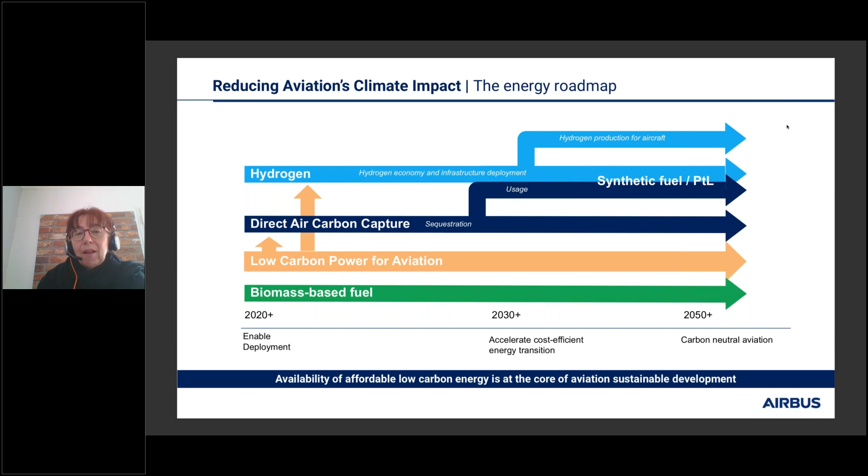So on the next slide, coming back to hydrogen. These are the three reasons why Airbus is seriously working on hydrogen for aviation use. First, hydrogen is a zero emission energy, providing, of course, that it is produced from renewables via electrolysis notably. It generates no direct CO2, and it has the potential to reduce also the non-CO2 emissions, such as NOx, as well as the impact of condensation trails.

And our colleagues from Onera spoke about one of the multiple projects that Airbus is engaged in to confirm such benefits. The second reason is the cost of producing H2 is likely to decline over the next decades as it gets widely adopted by various industries and as renewable power prices continue to fall. So this will make zero emission flying increasingly economical.

And third, as we just said, hydrogen could be used as an ingredient of power to liquid synthetic fuels or consumed directly on board an aircraft, either through direct combustion or through fuel cells or through both.

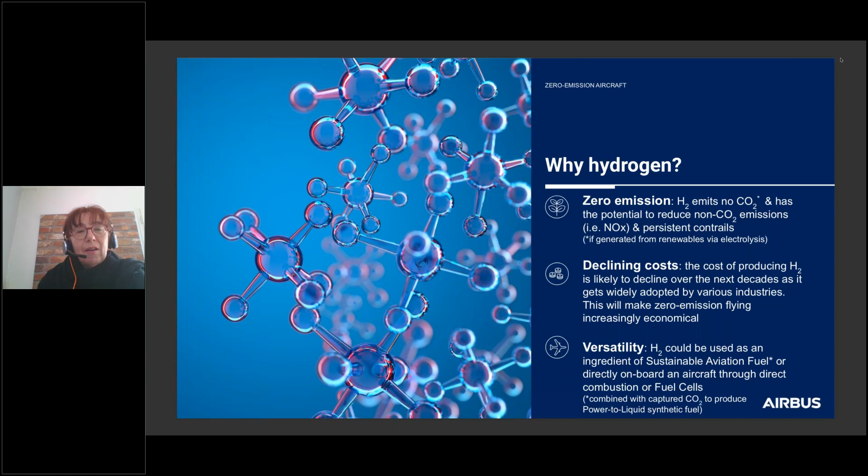So just to close, on the next slide, yes, we would like to close with a few pictures of the three concept hydrogen aircraft that Airbus is currently exploring. They have a seating capacity from 100 to 200 passengers, covering ranges up to more than 2,000 nautical miles with hybrid turboprop or turbofan engines, and of course, hydrogen systems such as storage of liquid hydrogen and also distribution. So that's the last slide from my side, closing on nice aircraft pictures.

So thank you very much, Frédéric. Well, we now are many to expect we'll be able to fly Airbus zero emission by then. And we'll address a few questions from the audience with Thilo Schanfeld. Please, Thilo. Yes, thank you.

Well, the first question was addressed to one of the first speakers of this panel, Chen Dotan. The question was, do you think that your ETAC technology is also suitable and can be used with seawater? In which case, should it be desalinated first? Mr. Dotan, please, if still connected. Maybe Chen had another meeting, maybe Avner Rothschild is here to answer. But if not, we'll address the question later on.

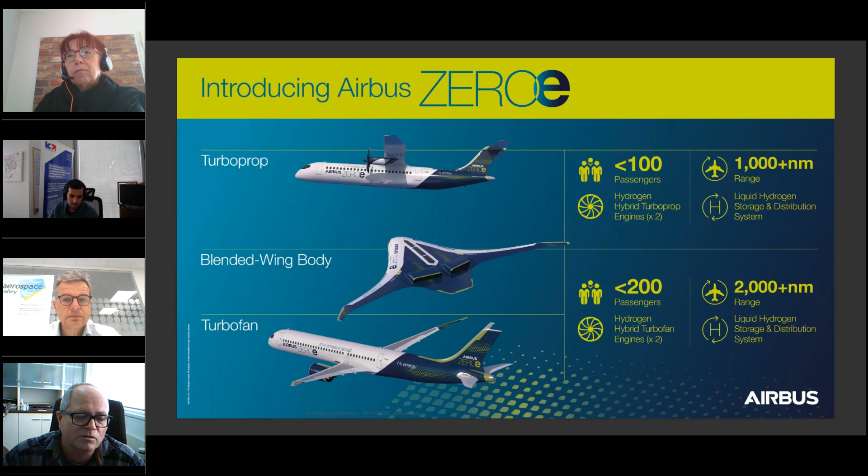So a membrane is a delicate component in electrolyzers. It is also prone to fouling and other issues which we do not have, and therefore we do have an advantage over conventional electrolyzers in this direction, but this is something that we currently do not pursue.

Okay, thank you. Now a question again in the chat box. I think it's addressed to Frédéric Rigal of Airbus. Are miniature nuclear plants such as molten salt reactors potentially competing solutions for aviation? Question asked by Alain Leray of the French railway organization SNCF.

Your mic is off. You're on mute. Frédéric? Yes, can you hear me?

Yes. Okay. Well, in fact, we are not a hydrogen producer, but we are looking at the various technologies to produce hydrogen in order to properly assess the costs of the energy, which has a strong influence on the cost of operating an aircraft, as you know. So in terms of which kind of power could be used to produce green hydrogen, we are quite agnostic. What is important for us is that it's a low carbon hydrogen and that it is available at affordable costs.

So of course, any low carbon power technology mature enough and available at low cost is welcome to produce the large amount of green hydrogen that we will need for aviation.